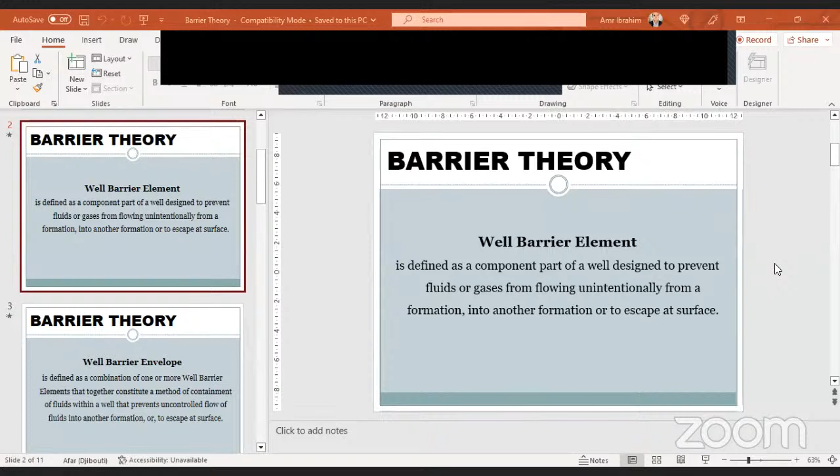And I noticed more than one person attended with me before. I think Abdul Hafiz, and I don't remember who is the other person. Anyway, inshallah, I will deliver something to you, and you get anything beneficial from this short webinar. So kindly confirm that my screen is obvious to you. Yes, your screen is clear. Okay. Okay, so

Let's start. Usually in well control courses, the first thing to be started is some definitions about kick, blowout, primary control, secondary control, equipment, and all of this stuff. But usually I like to, just a minute, I want this to be floating. Okay, so I think it's better now.

But usually I'd like to start with the barrier theory of well control, because everyone, I think, remembers what happened in 2010 at the Gulf of Mexico, the Deepwater Horizon awful accident. And you know, a lot of people died that day, and environmental impact, a lot of impact to BP company. So just as a brief for what happened that day, before the blowout,

they ran a 4.5-inch liner, did the cementing job, and instead of testing the cement integrity, they neglected to do the cement bond log and displaced the well to brine, and the cement was not good enough to hold the formation pressure. That's why the blowout happened. And after this date, the IWCF curriculum updated and included a very important part, which is the barrier theory. What is meant by barrier theory? We will know now about this very important point before talking about anything in well control itself.

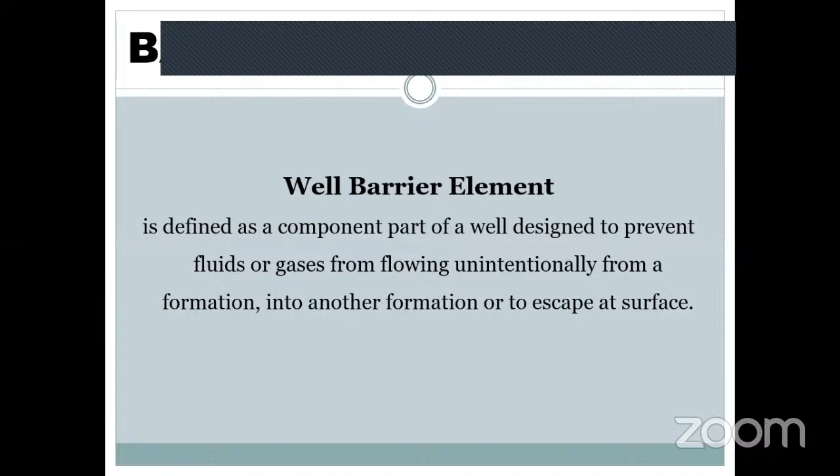But there is a condition here. If the barrier you have is not pressure tested, you don't have a barrier. And this will be described later. So the well barrier envelope, what is it? It is defined as the combination of one or more well barrier elements that together constitute the method of containment of fluid within a well that prevent the uncontrolled flow of fluids.

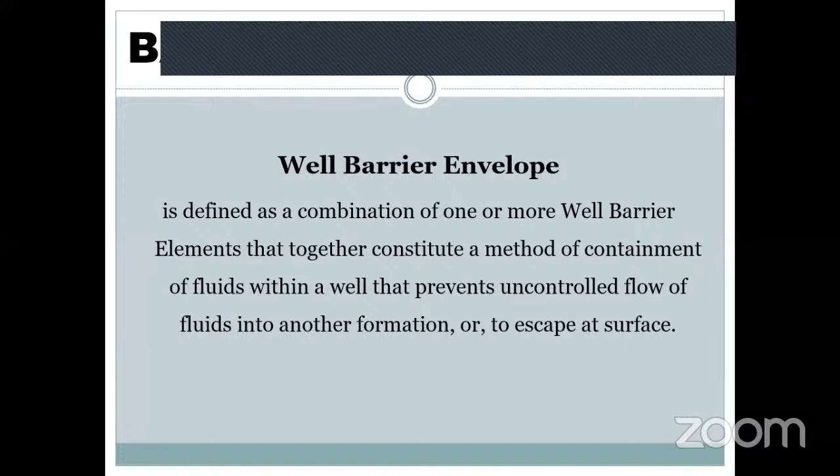So here we are not counting on only one barrier. We are not counting on the drilling fluid alone. We are not counting on the BOP alone. We have barriers in our system, and by definition we should have at least two

Just a minute, gents, I'm sorry.

We have a failure in the primary barrier, which is the drilling fluid. We have a failure in the secondary barrier, and we might have some other failures. So if all of this happened at the same time, you have a kick and might be a blowout. For example, a lack of procedure: the driller is not activating the PVT alarm. So there is an increase in the tanks, and he is not following it,

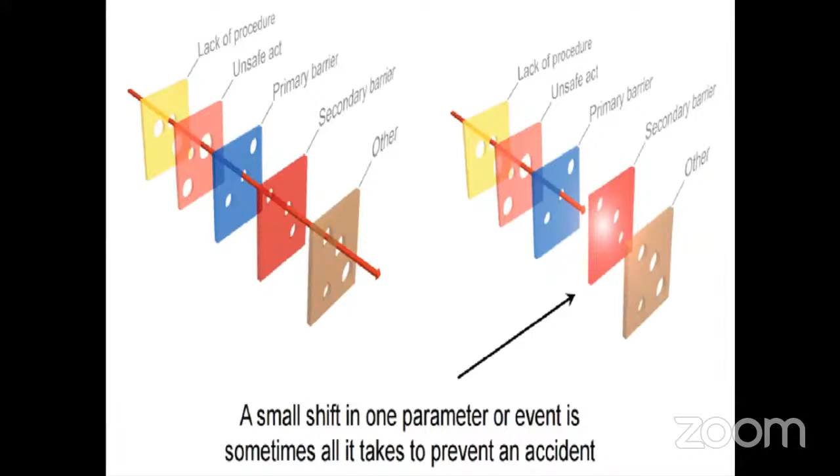So what are the types of barrier we have? We have mechanical barriers and hydrostatic barriers. So as I told you, a double barrier protection. This has become a general rule everywhere in the world. The oil industry is a worldwide industry, so this rule is applied to every place with any drilling operation worldwide. So a minimum of two tested, and you can put like 100 red lines after these tested barriers. It is not only the barriers.

Again, remember what happened in the Deepwater Horizon. They already put casing and did the cementing job, but they didn't run a cement bond log. They didn't do any negative testing. So it might be the cement quality was not good enough. You might have some leak in the liner gap. So this casing and the cement in this case is not considered to be a tested barrier. So we don't have a barrier here.

And what we are afraid of already happened, and a very catastrophic accident happened, and a lot of people died. And this is the most important, and a lot of resources wasted, environmental impact, and a lot happened with this accident. Okay, so a minimum of two tested barriers should be available at all times.

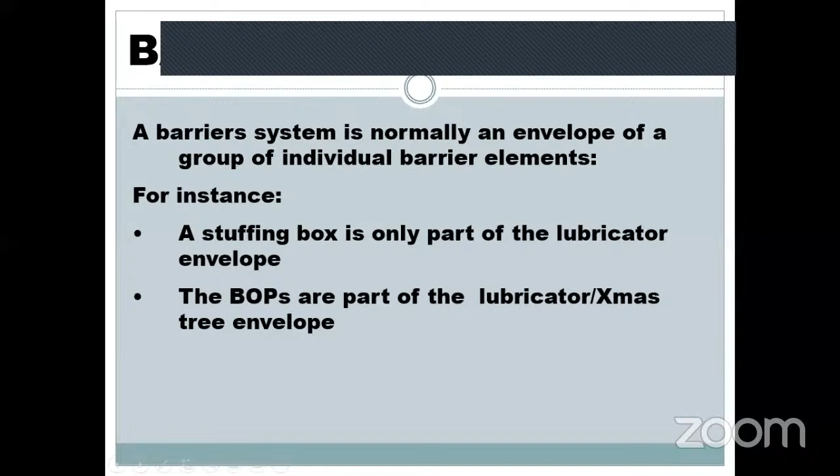A barrier system is normally an envelope of group of individual barrier elements. For example, the stuffing box is only part of the lubricator envelope. This is in the slickline operation. The BOPs are part of the lubricator Christmas tree envelope, etc. Okay. So what are the types of mechanical barriers?

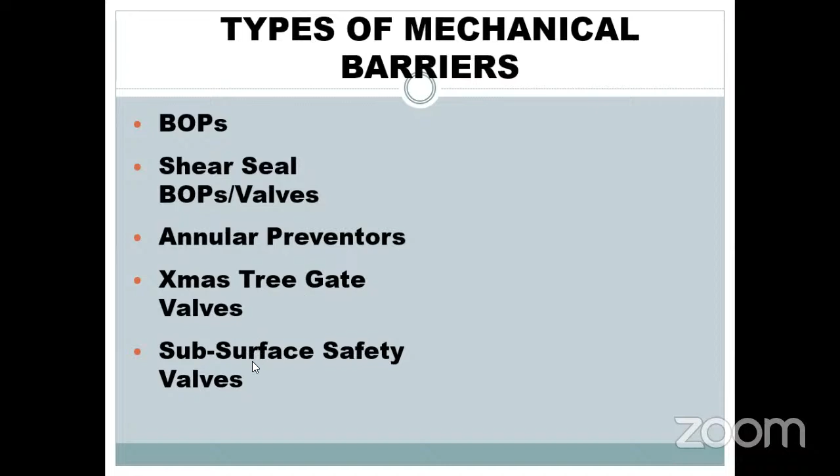I told you before we have two types of barrier: mechanical barrier and hydrostatic barrier. And you can easily imagine that the hydrostatic barriers are the fluids, either the drilling fluid or the completion fluid. The mechanical barriers are the BOP: the shear seal BOP valves, the annular preventer, which is part of the BOP, the Christmas tree gate, the subsurface safety valve.

Additional downhole barriers: the wireline plugs, but again, if it is not pressure tested, it will not be considered as a barrier. The bridge plug is also considered a barrier. The cement plugs, but again, they should be tested, positive test and negative test, to make sure that there is no leak for these cement plugs.

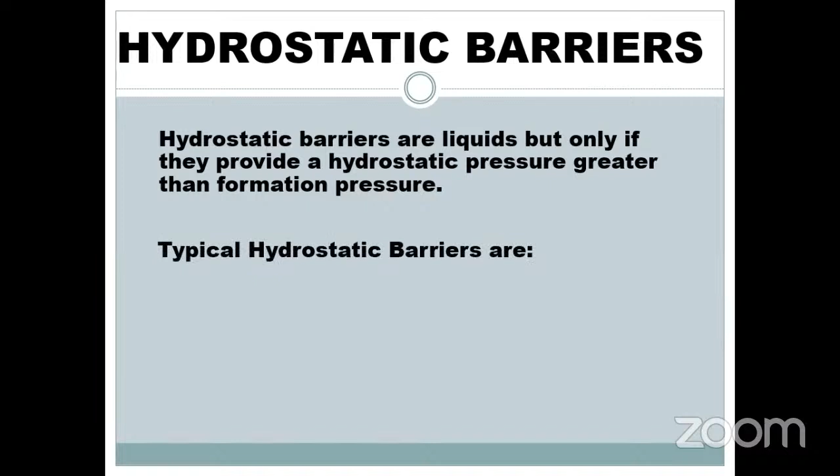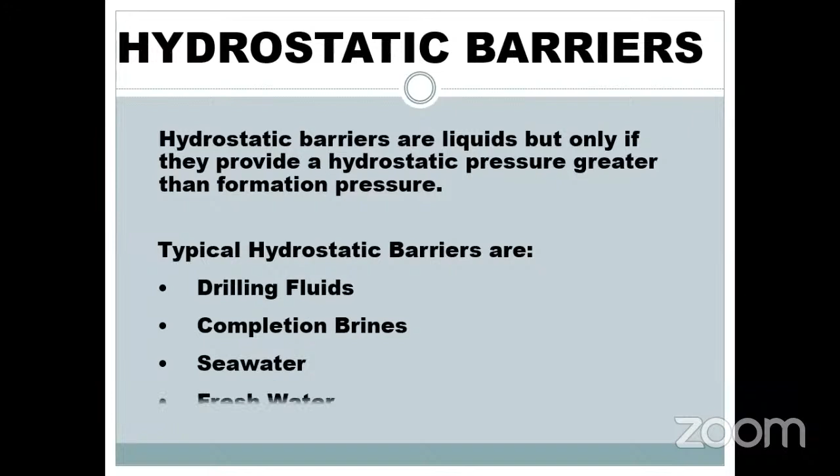The hydrostatic barrier is obviously the liquids, but only if they provide hydrostatic pressure greater than the formation pressure. So this is mainly the drilling fluid or the completion fluid, or sometimes seawater when we have complete loss and we are counting on the seawater plus some surface pressure, in case we have a tool like MPD or something like this. So mainly the hydrostatic barriers are the drilling fluid or completion fluid.

The hydrostatic barrier criteria: it must provide an overbalance at the top of the formation and must be observable at the surface. You remember every time we got losses, one of the recommendations that should be applied is to fill the well with any available fluid you have. For example, if you are on a land rig, you will fill with water if you can, or seawater, to see the level and provide any hydrostatic overbalance. If possible, use the plug to segregate kill fluid from the formation.

So this quickly is the barrier theory, and it is very important to be understood before talking about anything related to the drilling fluid and the problem of well control.

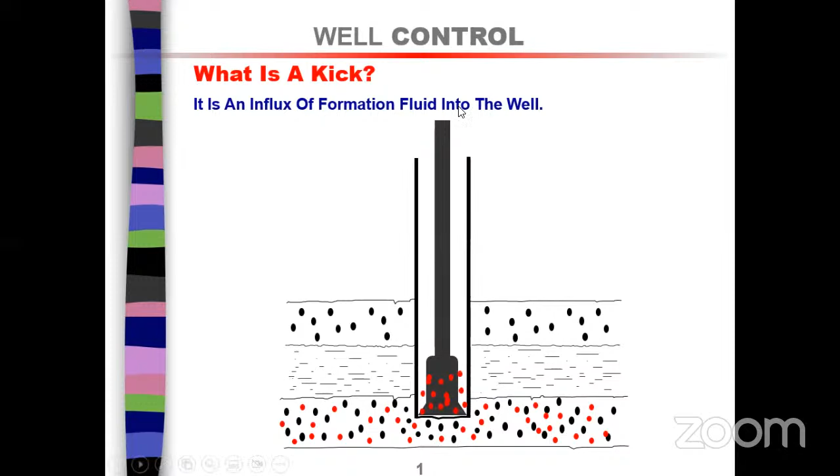Okay, gents, I'm back. So let's start with our definitions for well control. The first and most basic one is, what is the kick? The kick is an unintentional influx of formation fluid into the well. We are not putting this well into production; we are drilling the well or doing any completion job, and we have a fluid influx from the formation coming into the well.

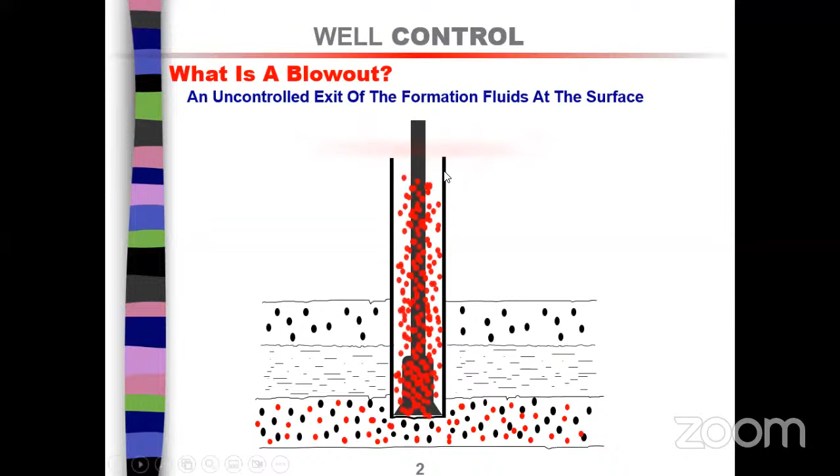Kicks happen every day in the world in drilling operations. If you have a kick, a blowout is not necessarily the consequence. In case you fail to control this kick, you will have the blowout, which is the uncontrolled exit of the formation fluid at the surface, like the most recent accident, Deepwater Horizon, and we all saw what happened there. So not every kick is a blowout, but every blowout is a consequence of an uncontrolled kick.

As I told you before, we have the mud window. We have two pressures that we cannot control; they are characteristics of the formation. One of them is the formation pressure. What is the definition of formation pressure?

All the formations we drill consist of rock grains and pore spaces, and these pore spaces have some fluid: it might be water, gas, or oil. As most of you know, most of the reservoirs we drill developed in a marine environment, and there is interstitial water around the grains, and the pore spaces might have gas, oil or water depending on the type of reservoir. This fluid, due to the overburden pressure, has some pressure inside it, and this is called the formation pressure. As a normal case, when you don't have any, sorry.

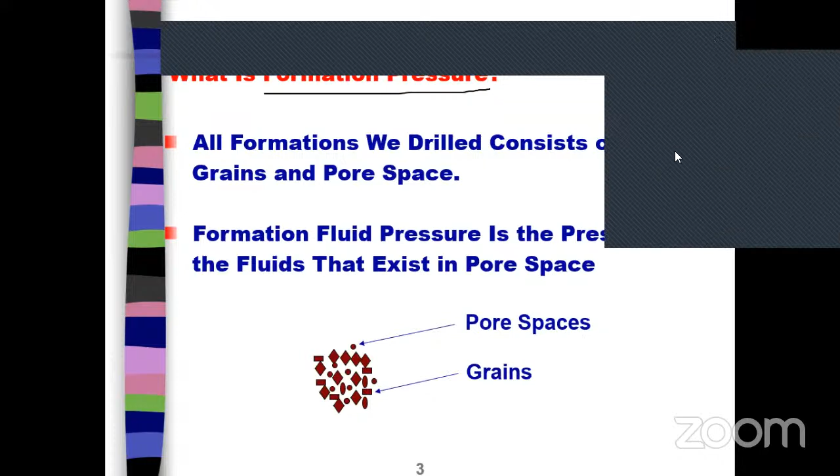In case you lose this pressure, this control on this pressure, you will have a kick.

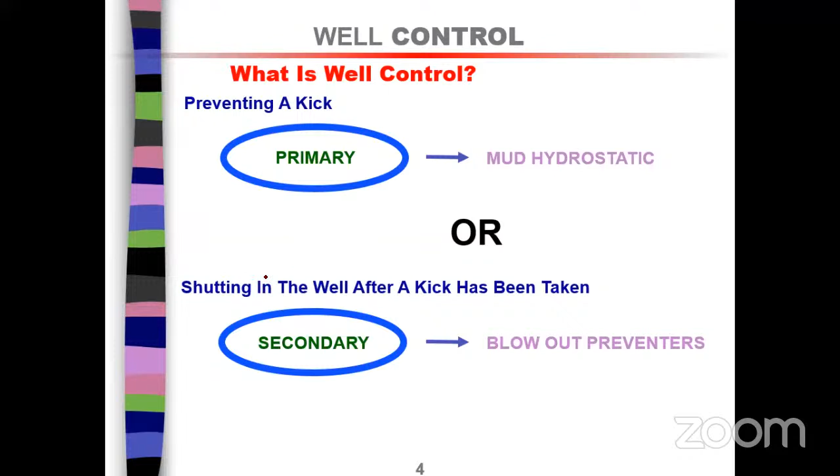So what is well control? Well control is preventing a kick. We have the primary well control, which is the mud hydrostatic, or in case we already have a kick, we shut the well using the secondary well control. We close the well, do our calculations, and pump the drilling fluid, which is a kill fluid, so we restore the primary control. Even if we have a kick and lost primary control, we can use the secondary well control using the BOPs, so it's okay.

We will close the well, secure the well, reading the pressures - shut-in drill pipe pressure, casing pressure, all of this stuff. The main reason for this is to restore the primary pressure, the primary well control, by pumping the kill fluid, because the primary well control is the main barrier while drilling or doing a completion job.

So we are doing primary prevention here. Don't forget that we are counting on a barrier envelope. So for example, if we are drilling, we are using the hydrostatic barrier, which is the drilling fluid, plus the BOP, which is another barrier.

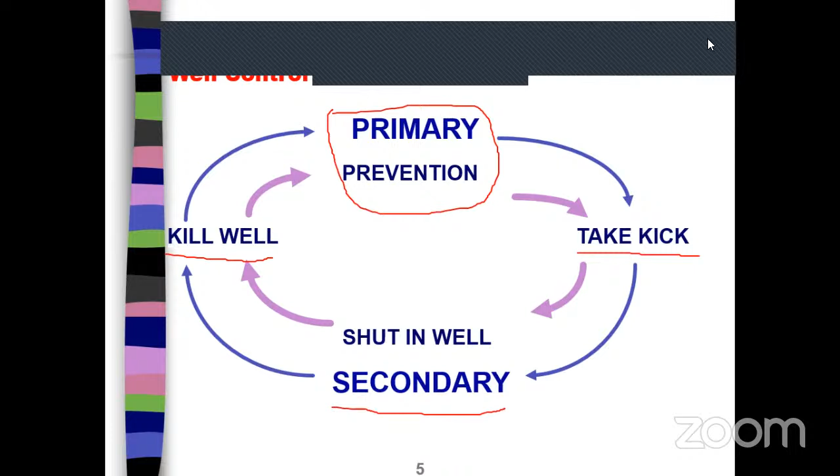Kill the well, calculate what is the required hydrostatic pressure to kill the well, and this killing of the well will help us restore the primary prevention. Then we assess the well for sure, and make sure that the well is secure and we can continue our operation normally. So this is the cycle.

Don't forget also that we are counting on the barrier envelope, not a barrier element. So if we are counting on a barrier element, which is the drilling fluid, and we lose this barrier element, and for example if we don't have a pressure-tested BOP or a leaking BOP or any problem with the BOP, we cannot close the BOP, so we cannot control this kick, and we might have a blowout.

This is very important. In case we have a liner, we run a liner and do a cementing job, and we didn't do a negative test for this liner or CBL, cement bond log for this cementing, and this liner lap is leaking, and we go to the next section and reduce the mud weight or pump a lower weight, we will lose well control and we might have an uncontrolled flow of fluid, and we might have a blowout.

So how can you prevent the kick? You should know what are the causes of the kick - this is the next presentation for us, inshallah - what are the causes for the kick, and use the correct rig practices.

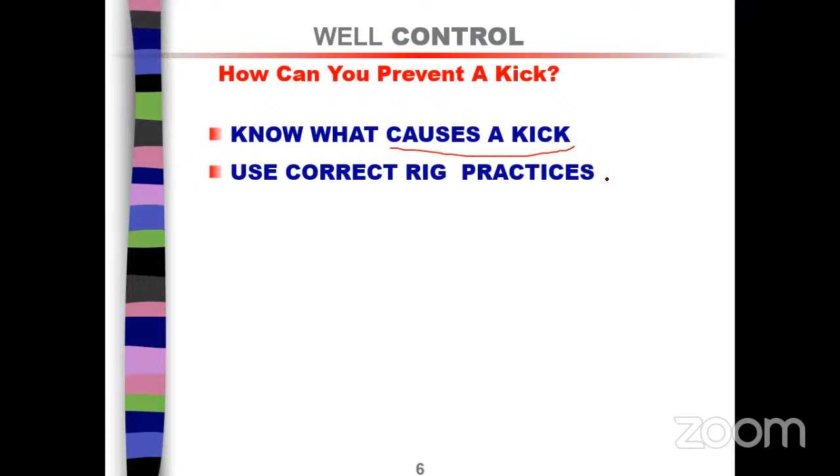So, for example, what are the correct rig practices? The driller should activate the alarm for the PVT pits. The derrick man should inform the driller of any transfer to the active pits. If we are tripping in or tripping out, we should follow the trip sheet and pay attention to any deviation from the calculation. This is just an example of best practice.

Anything that will reduce the mud weight, and we will talk in details about this, inshallah. For example, if you have high background gases and you are not intervening, not running the degasser, not monitoring the mud weight, and you have a gas cut in your mud.

For example, if you have very fine screens that are discarding the weighting material, the barite. Or if you are running the centrifuge for a long time, and this centrifuge is causing mud weight to go down and your weighting material to go away, you will have a loss of mud hydrostatic.

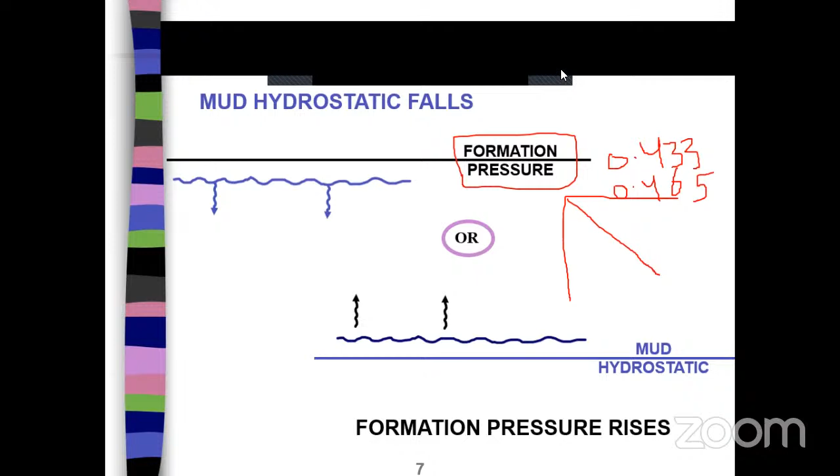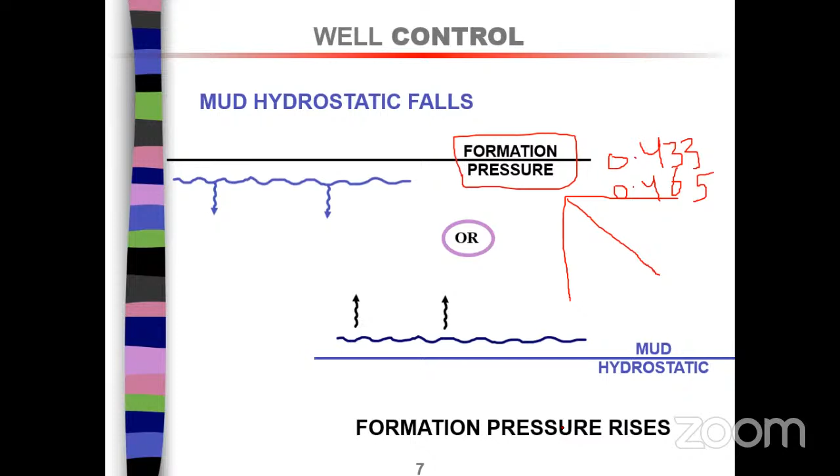So you have two scenarios here: the hydrostatic pressure falls below the formation pressure due to any change in the mud weight, or the formation pressure itself rises because you enter an abnormal pressure zone.

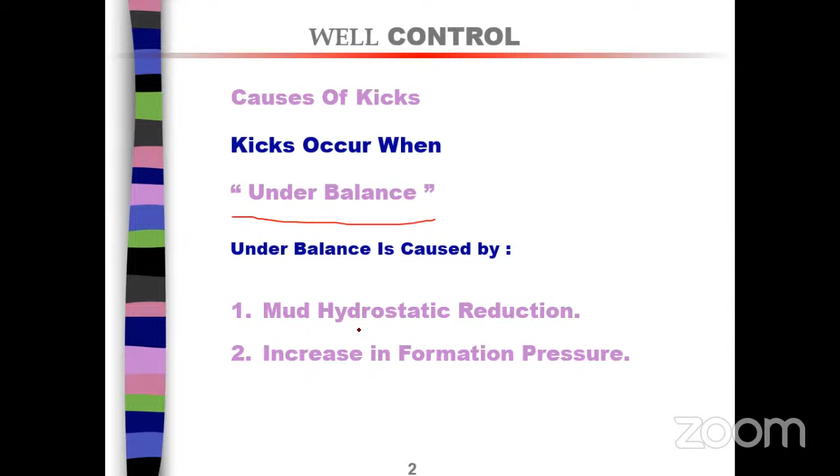So the underbalance is caused by, I told you before, the mud hydrostatic reduction or the increase in the formation pressure. Okay, so this is the golden rule, our golden rule in our industry.

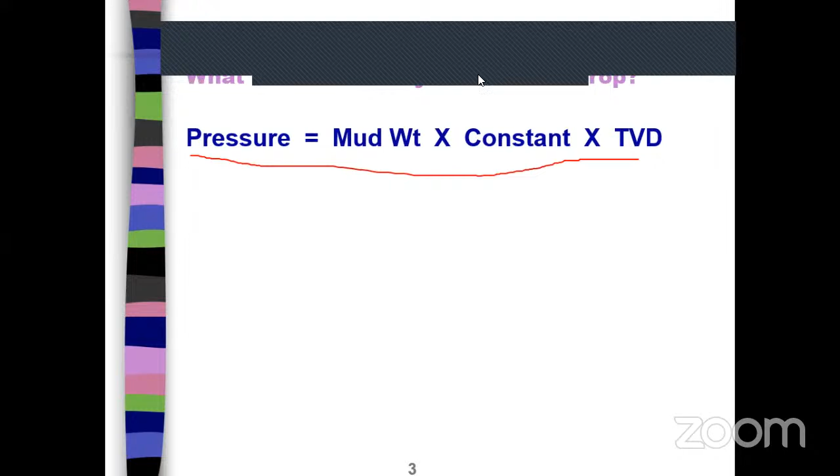Any pressure we have is calculated by the mud weight of the fluid we are using, multiplied by a constant depending on the units we have, multiplied by the TVD. The most common one has the constant as 0.052, with the mud weight in PPG and the TVD in feet, giving the pressure in PSI, pound per square inch. This is the most common one.

So we have here two reasons, or two factors, causing the pressure to drop: the mud weight might drop, or the length of the mud column might drop. So what are the reasons that might impact the mud weight? Let's see here.

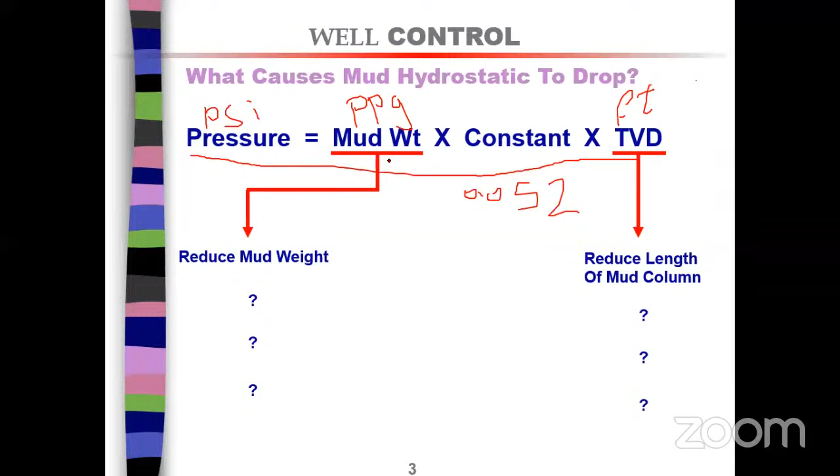Now the last slide we are talking about: we have the pressure equals mud weight multiplied by a constant multiplied by the TVD. We have two reasons causing this mud weight, two reasons causing this pressure to go down. The first one is the mud weight reduction or the TVD reduction. Let's talk about them one by one.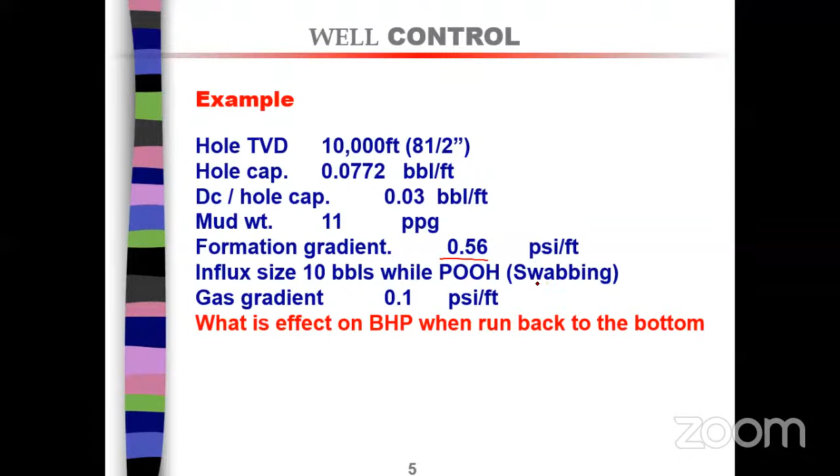You have bubbles here, you pull out of the hole, you have trip gases or trip bubbles, and you run into these bubbles, and this will reduce the pressure. When you go to the exam, you have an equation sheet, you have an equation for this type of question, and you will calculate the effect on bottom hole pressure. For sure, the bottom hole pressure will reduce.

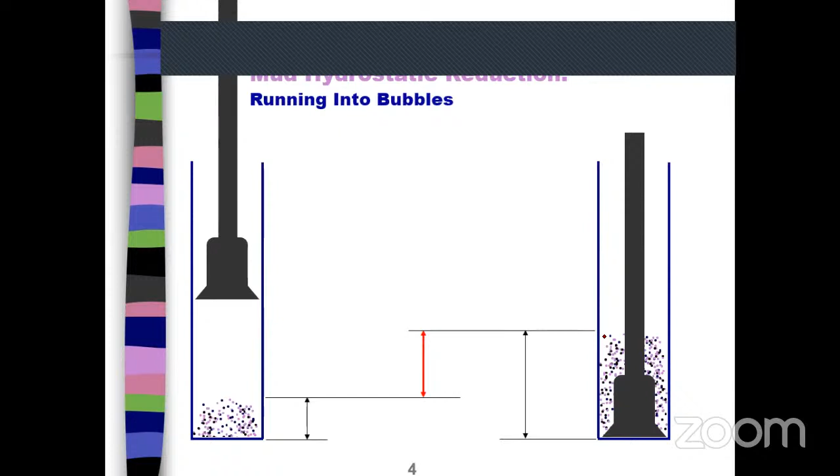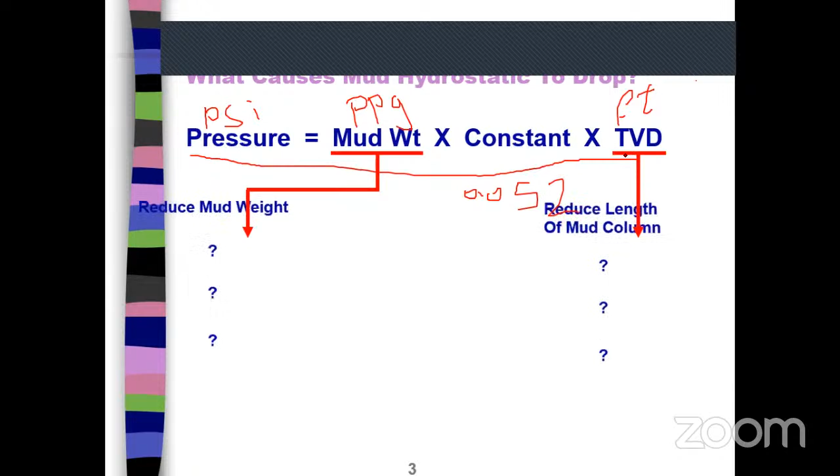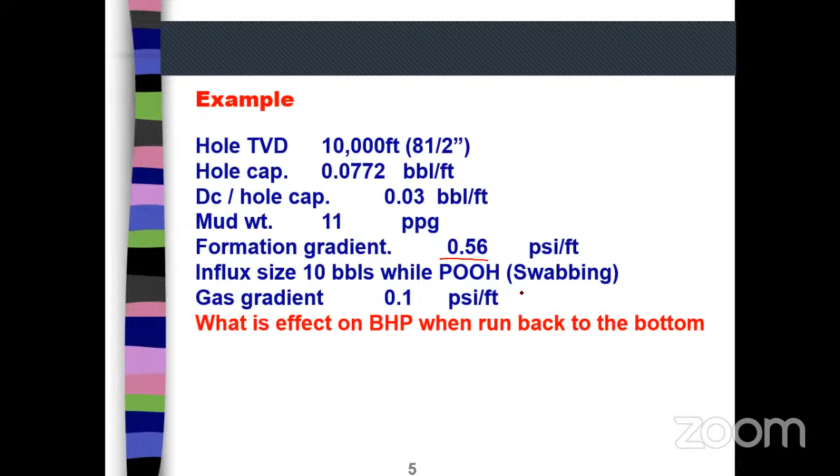Why? Because here, for example, you have 10 or 11 ppg as the example, 11 ppg, and you have the gas gradient in this area, the bubble is 0.1 psi per foot. So it will be very easy to calculate how far the gas will go up and reduce your hydrostatic column or reduce your TVD. Remember this equation - it will reduce your TVD, and it will also reduce the formation pressure, the hydrostatic pressure. Through some equations, inshallah, in the course, we will highlight this using the equation sheet and solve many questions about this, inshallah.

You can see here, guys, I'm trying to make this quick just because we have limited time, but this is just an introduction to what we are going to discuss in detail in the upcoming course, inshallah.

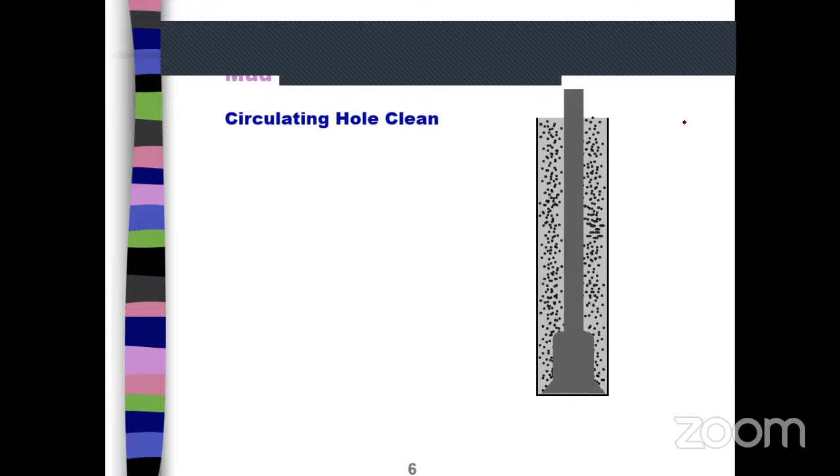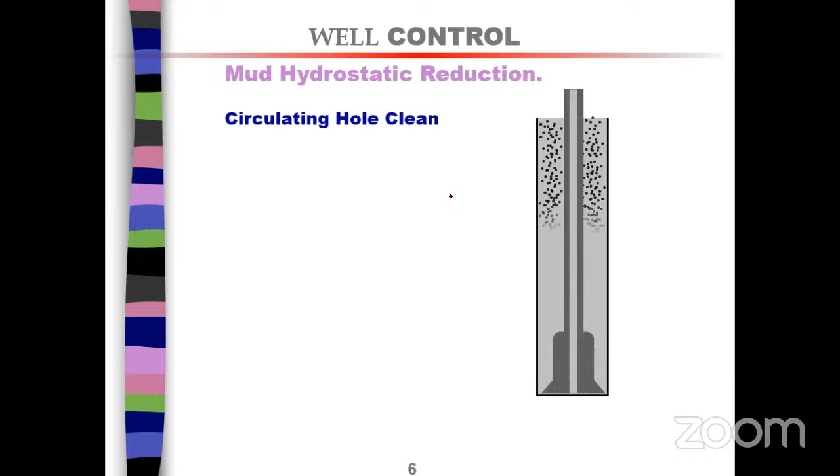Circulating the hole clean - when we have cutting in the hole, this cutting is acting as, these solids help to increase the bottom hole pressure. So when we circulate this cutting out of the hole, this is for sure very important, so we remove all of this cutting. In case we have a narrow window, remember this point, because for sure we should clean the hole, but in some cases we have narrow window operations.

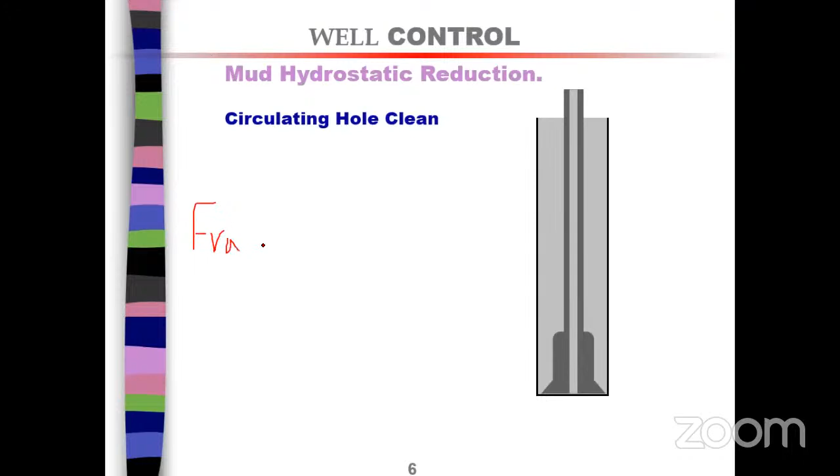That's why MPD, managed pressure drilling, is one of the techniques used in these cases - when you have a narrow pressure window. Remember the mud window I told you before: we have the fracture pressure, and we have the mud weight or hydrostatic pressure. It should be higher than the formation pressure, and it should be lower than the fracture pressure.

In some cases with narrow window applications, you have, for example, 100 psi difference between the fracture pressure and the formation pressure. You are drilling, you got losses, you stop the pump, you got flow - this is a narrow window application.

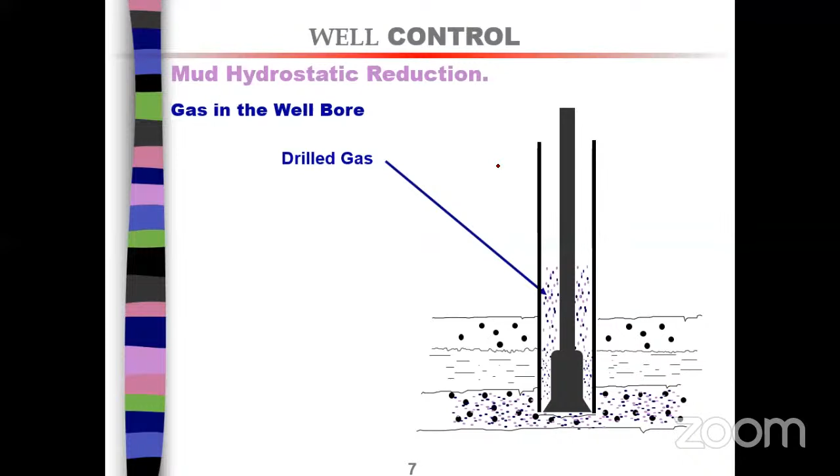So also cleaning, circulating the hole clean and removing the cutting, might reduce the hydrostatic pressure a little bit, and in case you have a narrow window application, you will lose part of your hydrostatic pressure. For sure, gas in the wellbore will reduce the mud weight, and this is called the gas cut mud weight.

And we also have the effect of gas expansion. You know the gas expands when it goes up, and this expansion will cause the hydrostatic pressure to go down. For example, if we have a gas bubble here, and we are not monitoring our system, and we let this gas go up, the pressure will go down. So when it goes up, the pressure on the gas will reduce, and this gas will be allowed to expand - gas expansion.

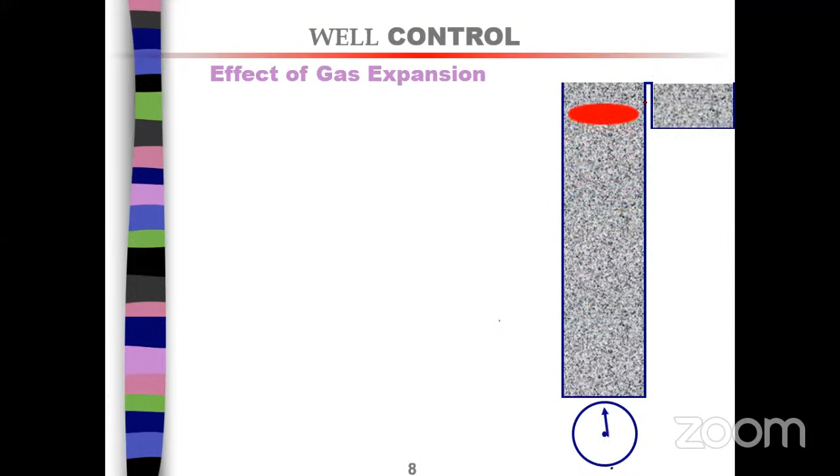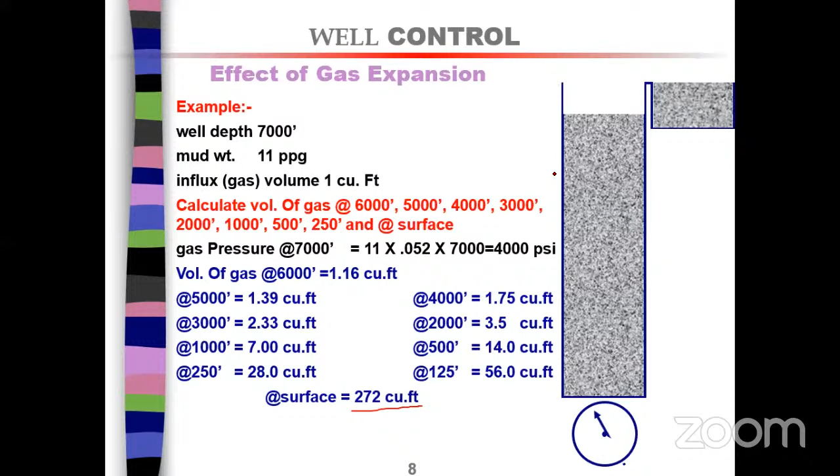And this gas expansion, you can see here on the trip tank, there is fluid to be removed. What is the result of this? A part of the fluid in the hole will be lost, so your pressure will be lost. You can see here the volume of gas at 6,000 feet is 1.16 cubic feet, and at the surface it is 272. So try to imagine the increase in volume of the gas, which translates to loss of TVD and loss of the hydrostatic pressure.

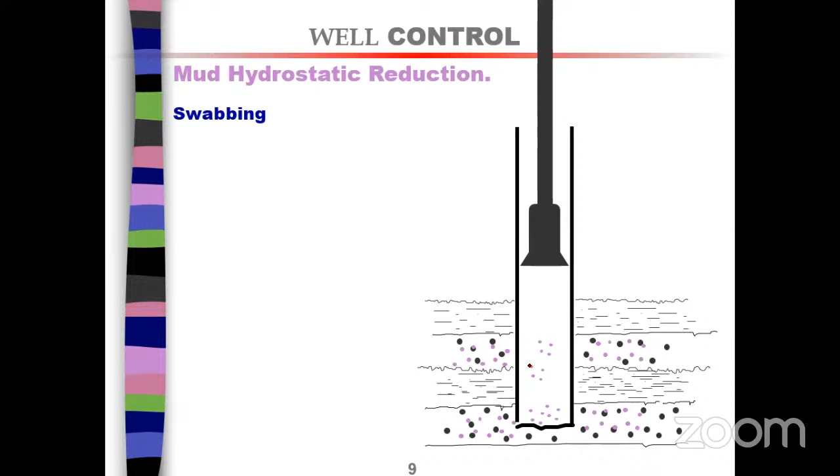Also, one of the reasons for mud hydrostatic reduction is swabbing. When you do tripping out, it should be at a controlled speed, and this speed should be controlled to avoid any swabbing effect. The swabbing effect is like suction of the fluid from the formation by making a vacuum here, and this vacuum will induce the suction of fluid from the formation.

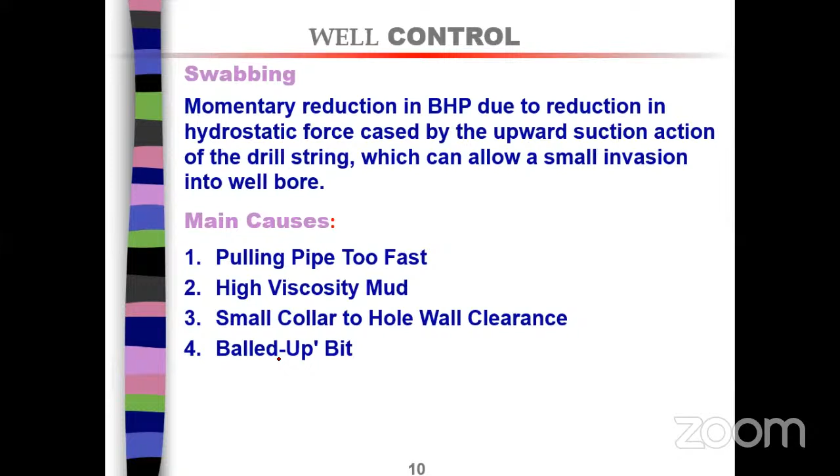Okay. What are the main causes of swabbing? Pulling the pipe too fast, very high mud viscosity, the small clearance between the drill collar and the hole wall, and if you have a balled-up bit, when you have the bit balling from any clay or any chemical or any formation, it might also increase the swabbing tendency or the swabbing effect. Okay.

Also, one of the causes of reducing the hydrostatic pressure is pumping light mud, and for sure, pumping light mud here will be by accident. It is unintentional pumping, because sometimes we pump light mud intentionally. In some cases, for example, we are doing a negative test. In some cases, we are doing something called tandem pills, and this is used for cleaning in highly deviated and horizontal wells. But for sure, when we are doing these tandem pills, we are doing it with calculation.

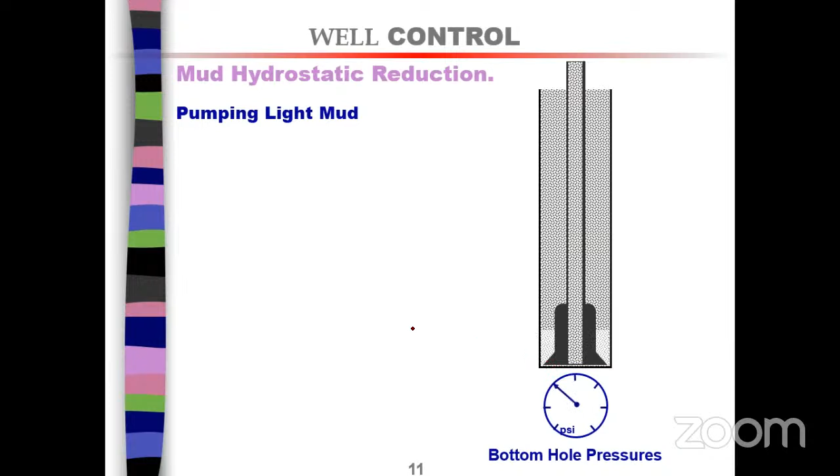So we are pumping low weight mud, followed by a high weighted pill, and these will equalize themselves to provide the required bottom hole pressure. But when we are talking here about pumping light mud, it will be unintentional, so it will go down, and once it goes out from the pit, it will reduce the bottom hole pressure, causing a reduction in the mud hydrostatic. Okay.

Also, I told you about loss of barite, so we might reduce the mud weight. Loss of barite comes from the centrifuge: you are running the centrifuge for a long time, and you are not following the mud weight properly. You have shakers discarding the barite. You have the desilters. Also, barite settling might be caused by poor mud properties. For example, you might have a low viscosity mud with high barite content, and this causes the barite to settle. Okay.

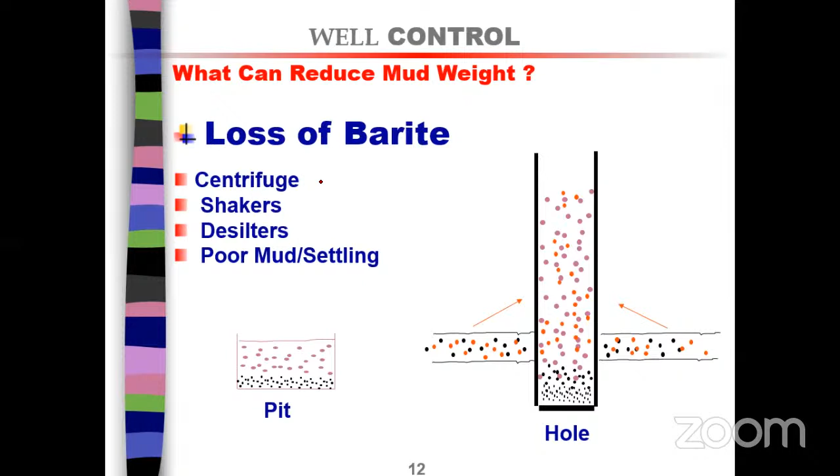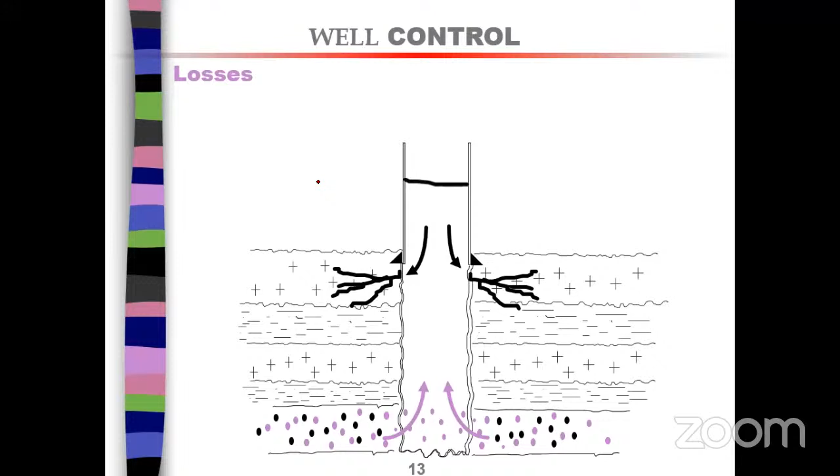So one of the most common reasons of losing well control or losing the primary barrier is losses. When you have losses, you will lose the hydrostatic column of your well, and for sure this will induce a reduction of the mud hydrostatic, and the formation pressure will exceed it and go inside the well. Okay.

Also, pulling out without filling the hole. I told you one of the good practices at the rig, at the start of this presentation: when you are pulling out, you should follow the trip sheet. You are filling it based on what you have inside the well. The trip sheet, inshallah, or the kill sheet will be discussed in detail in the upcoming course. So you have a kill sheet or trip sheet.

Pulling out of the hole dry. You can see here pulling out dry or wet. This is also part of the questions that come in the IWCF and WellSharp exams. It gives you some equations and examples saying that we are pulling out of the hole dry, so what will be the lost hydrostatic or lost level of the mud?

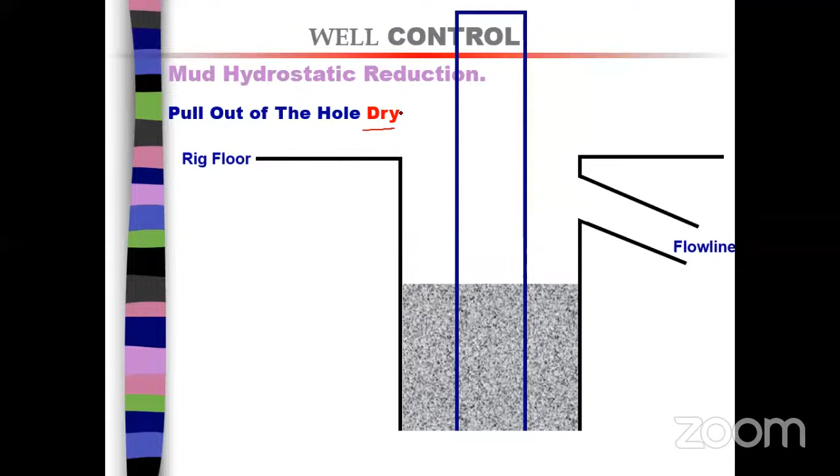For sure, the difference between dry and wet is the metal displacement and the inside capacity. This, inshallah, will be highlighted in detail while we are doing some calculations using the equation sheet, and we will highlight some of these examples which you will see in any IWCF and WellSharp exam.

Let's go back to dry. If you pull out dry, the metal displacement will be the only factor affecting the filling of the hole. If you go wet, the reduction will be higher.

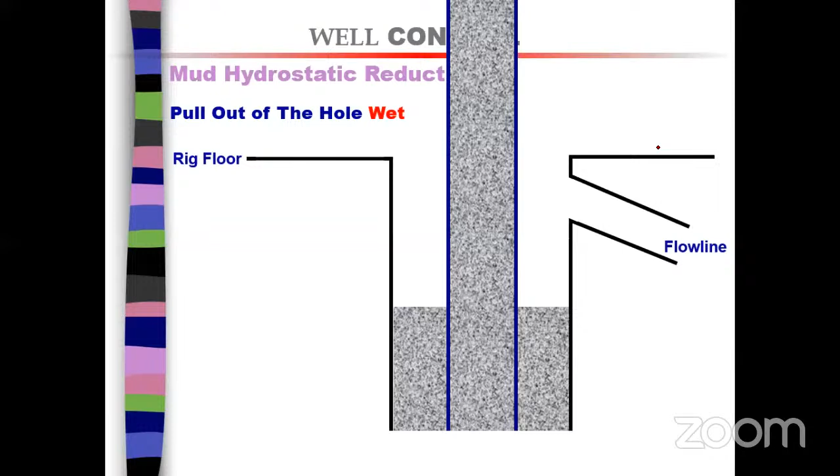So like this, so it should be calculated very accurately to fill the hole based on this calculation. Okay, that's why we have many equations differentiating between pulling out wet and pulling out dry. Okay, so this is part of the equation sheet. Inshallah, you will get it in case you are testing IWCF or WellSharp, and inshallah we will go one by one in this equation sheet in the upcoming course.

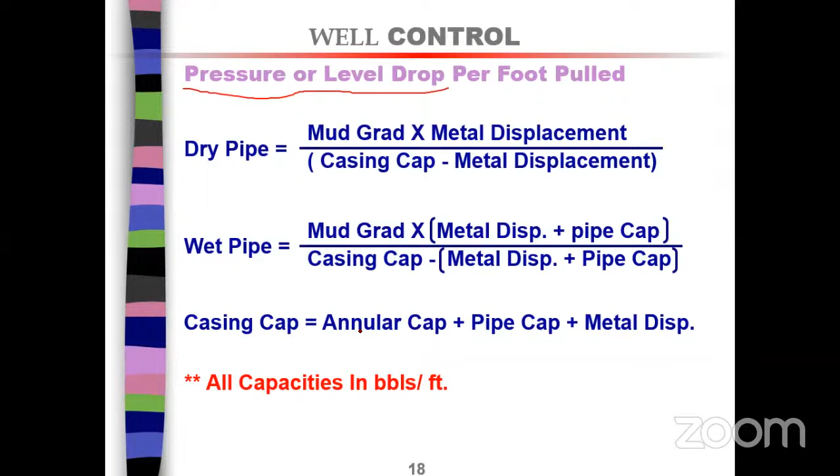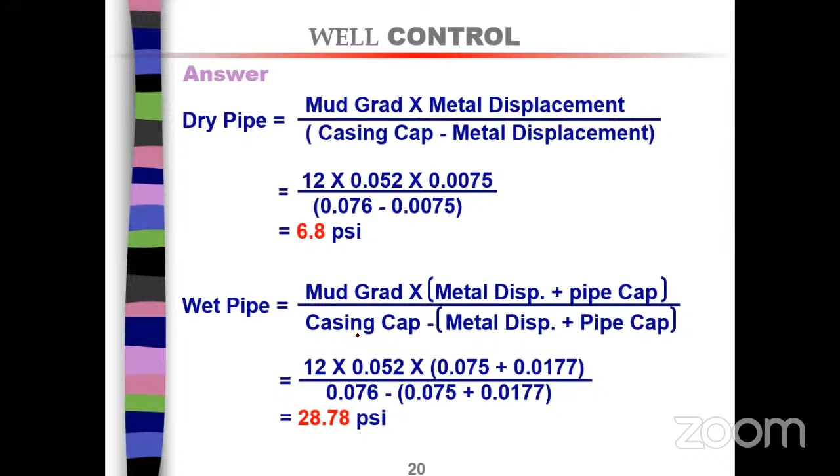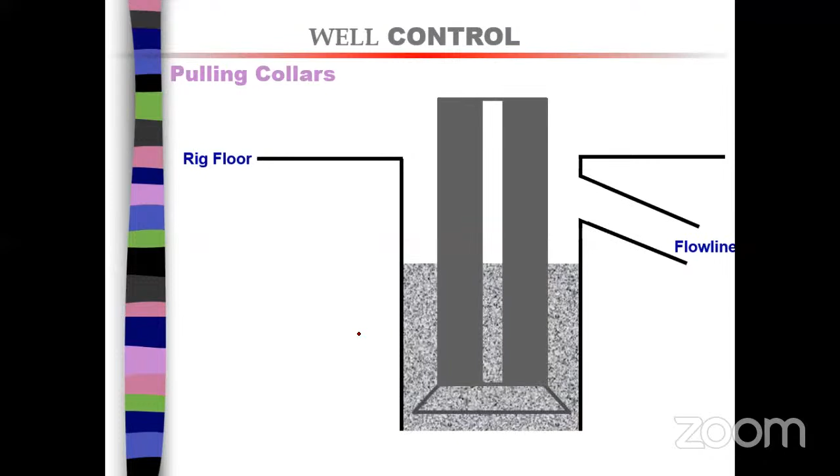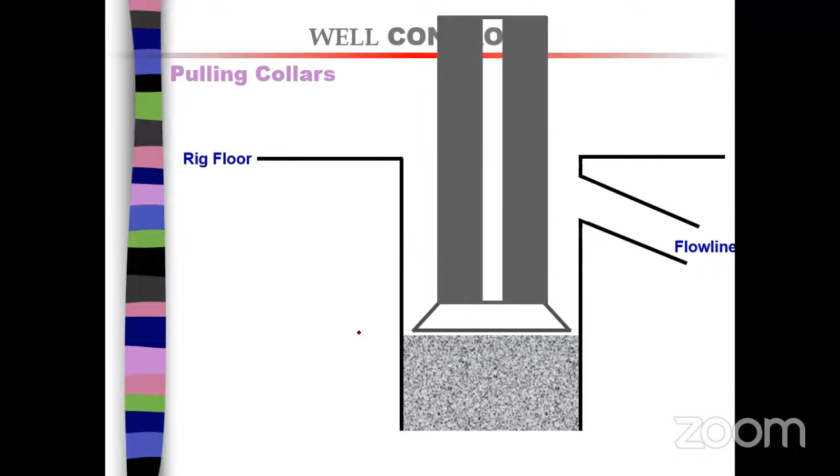So for example, here is the drill pipe, the dry pipe: the mud gradient multiplied by metal displacement over the casing capacity minus metal displacement, and here's the wet pipe, and here's the casing capacity. Okay, so this is part of the equation sheet, and this is also part of the examples that we will solve together. And also here there is a difference between the collars and drill pipe. You know, drill pipe is small relative to the drill collar. That's why we have a different equation for the drill collars, pulling it wet and pulling it dry. So we should also account for these drill collars and fill the hole as per this calculation. Otherwise, we will lose the hydrostatic. Okay, and this is also part of the examples.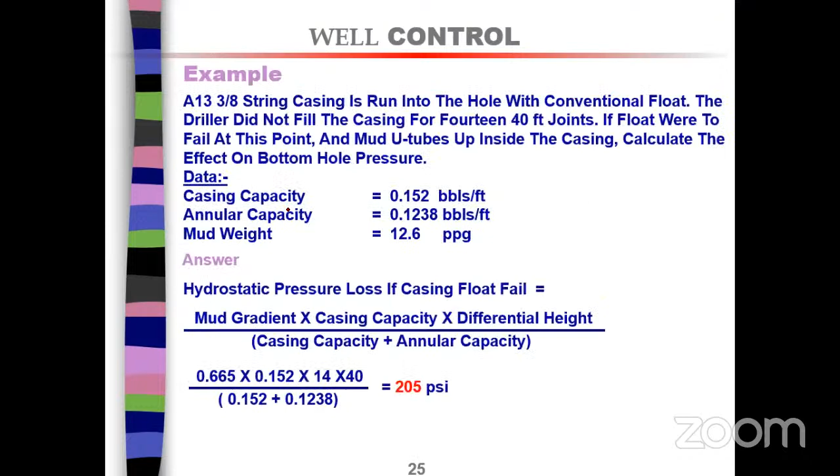Okay, inshallah. I'm fast because we already finished our 1 hour, but I will try to finish this. But as I told you, this is just teasing for what we are going to provide you in the upcoming course. Okay.

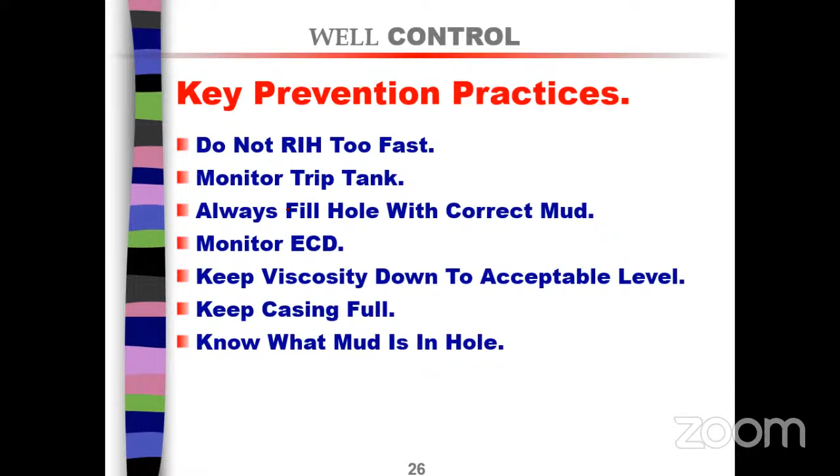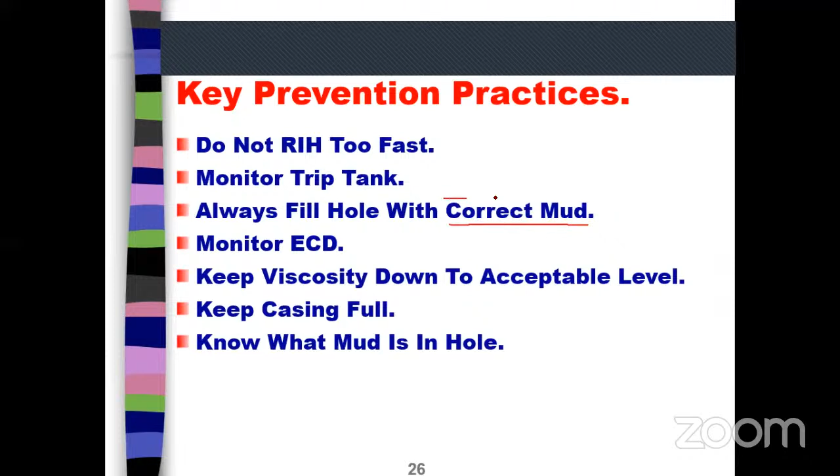So what are the key prevention practices for this? Don't run in hole too fast, because this will increase the possibility of surging. Surging is the opposite of swab. So you can make surge, and this will increase the possibility of losses. Monitor the trip tank. This is very important. If you have very accurate trip sheets, you should monitor it. Always fill the hole with the correct mud, meaning the correct mud weight. So any mud going inside the hole should be monitored by the mud engineer and the derrickman to avoid any reduction in the mud weight.

Monitor the ECD, and I think all of you know what ECD means. It is the equivalent circulating density, the density that comes from the friction of the drilling fluid with the annulus, and this is extra pressure applied to the bottom hole. This should also be accurately monitored to avoid any increase in the ECD, which will increase the possibility of getting losses.

Okay, keep the viscosity down to an acceptable level. Inshallah, when we talk about the mud parameters, as I tell anyone attending any drilling fluid course with me, the drilling fluid parameters should follow a certain range. The viscosity is very important for hole cleaning, but it should be high enough for hole cleaning without increasing the friction or the ECD, and it should also be in a range that prevents the swabbing effects while pulling out of the hole.

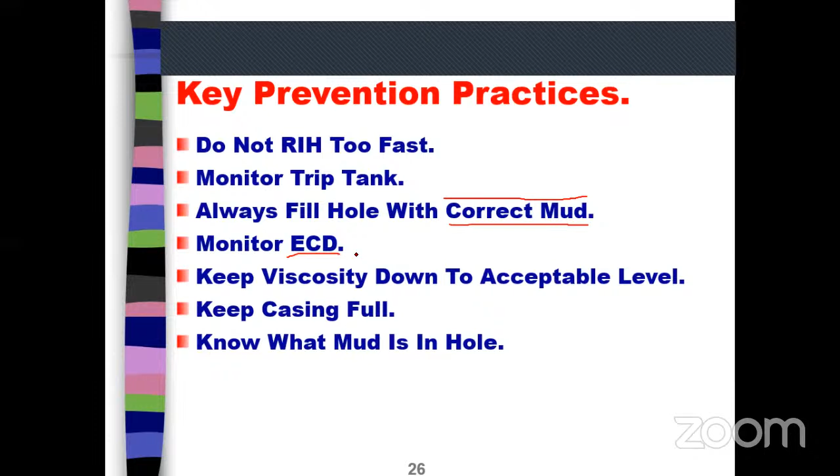Okay. For sure, keep the casing full all the time while running the casing, and know what mud is in the hole. That's why it is very important for the derrickman's duties to monitor the mud weight and announce it every 30 minutes, and in critical operations every 15 minutes. Okay, so this is very critical.

I told you there are a lot of causes for abnormal pressure, but I will not highlight them now: under compaction, faulting, sand lenses, salt domes, the artesian effect, the gas cap, the leak around casing. The most common ones are the sand lenses and the faulting, but we will not cover them now because we are already late for finishing the presentation. Okay.

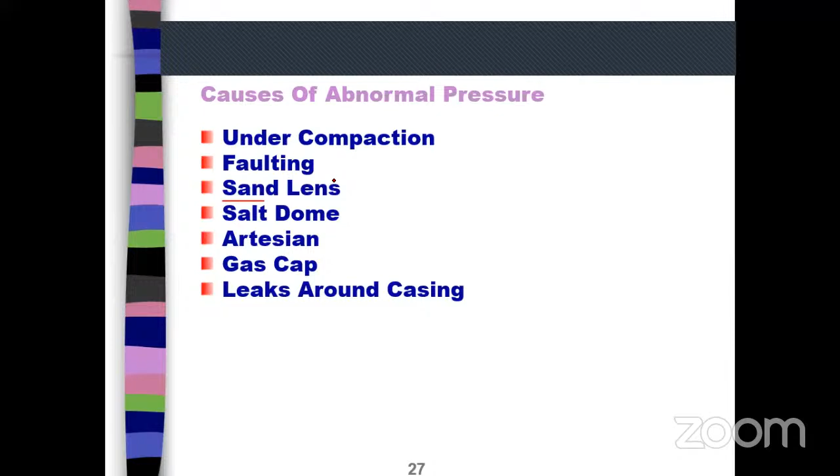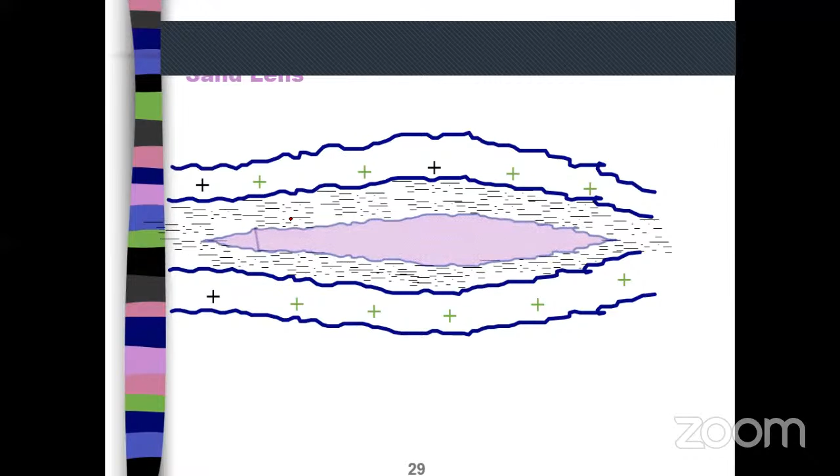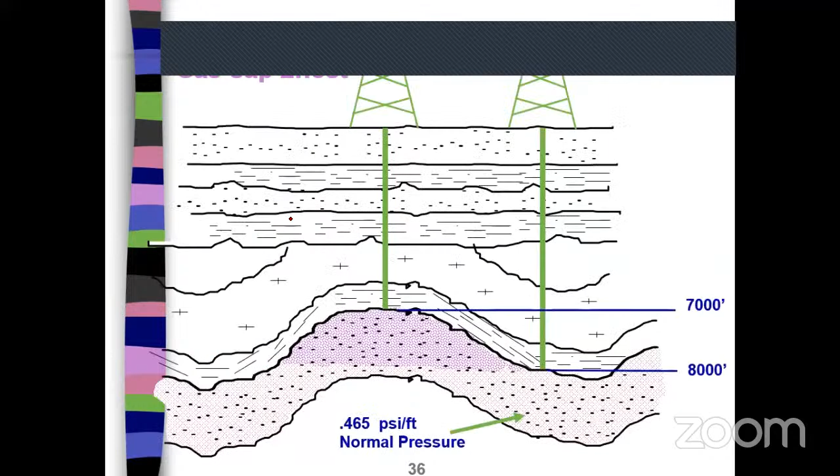Okay. So I told you the sand lens is the most common one. What is a sand lens? It is a sand formation surrounded by shale formation, and this shale is causing the fluid not to escape. You know, there is something called permeability, and the permeability of the shale is very low, while the permeability of sand is high. Due to this low permeability, the fluid is not allowed to go out. So that's why it will be trapped, and you will find high pressure at unexpected depths, and this is the sand lens. Okay, inshallah we will cover all of this in detail in the next course.

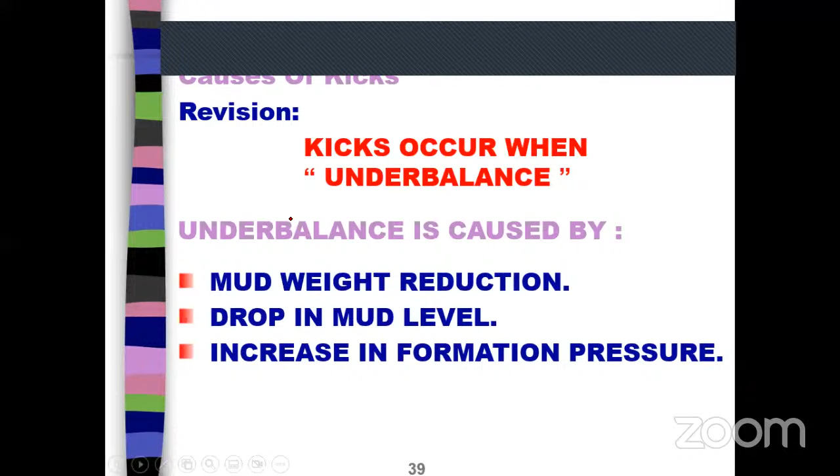I think we already finished our planned hour. I know we didn't cover a lot, but this is the webinar. It is not a course. It's just a quick introduction of what we are going to cover. So let's talk quickly about what we will cover in the upcoming course.

So we will continue the causes of kick and abnormal pressure situations. We will highlight the warning signs and indicators of a kick, and this is very important. I told you one of the practices is to monitor the kick, and you have warning signs. Warning signs warn you like a yellow light: be prepared, something is going to happen. Okay, and in case you already have a kick, you should know what to do to shut in the well.

Okay, there are two common shut-in methods: the soft shut-in and the hard shut-in. What are the differences between these shut-ins? When you shut in the well, you wait for the pressure to stabilize and you should collect some data, okay? So what are the data to collect? Shut-in drill pipe pressure, shut-in casing pressure, the pit gain, and you should have a pre-filled kill sheet, okay?